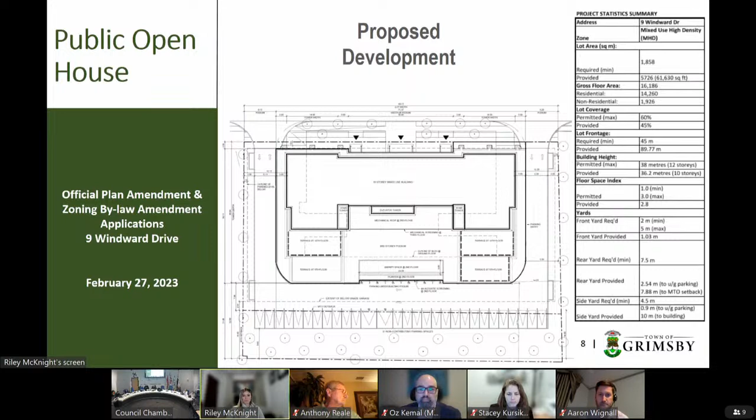As per section 1.4.4, to determine whether an amendment is appropriate, regard shall be had to numerous sections of the official plan, including section 2.0 on the vision and municipal structures, goals, and objectives, land use categories in section 3.0, and the implementation policies found in section 9.0, among other policies.

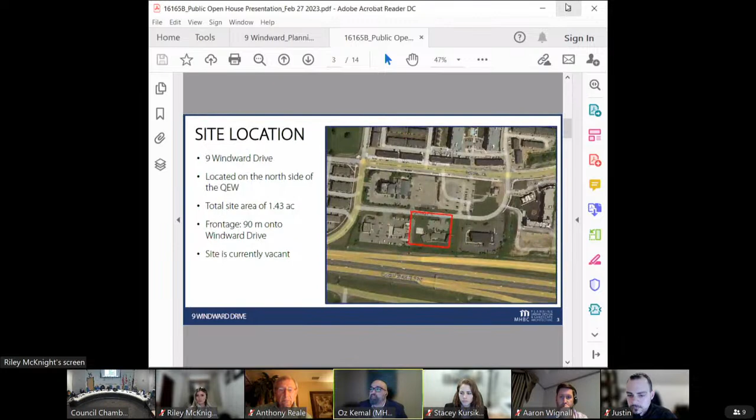Next slide, please. As Riley already pointed out, the subject site is located north of the QEW, west of the Casablanca interchange. The site is approximately 1.43 acres in size with 90 meters of frontage on Windward Drive. The land is currently vacant, but was previously used for a model home sales center, which were removed in September of 2022.

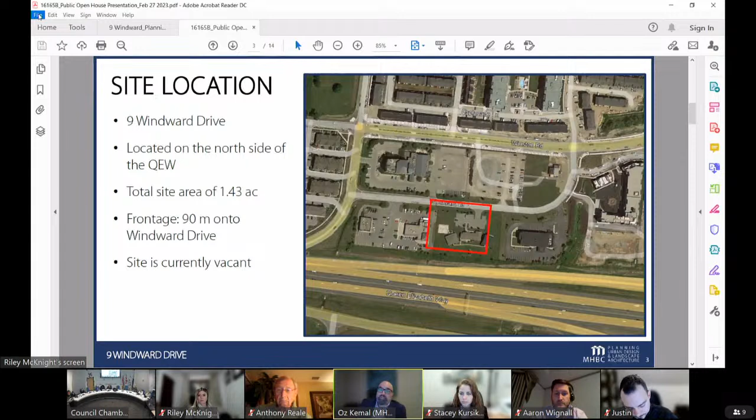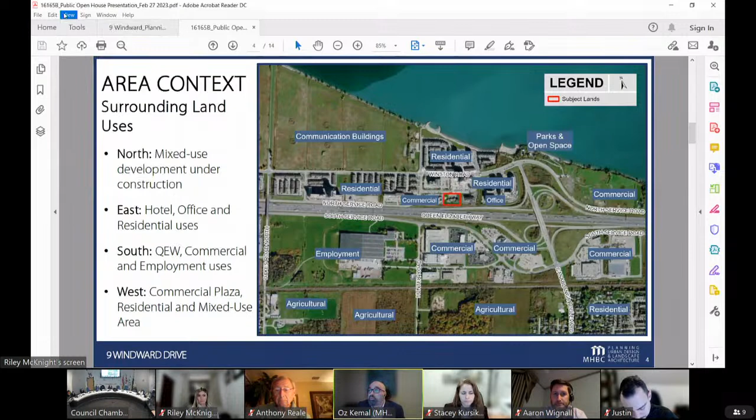Next slide, please. This is just a slide showing the subject lands in red, and then some surrounding area context. As you can see, there's a variety of uses, and the area is undergoing significant growth and transformation. To the north, opposite Windward Drive, there's a mixed-use development currently under construction, which we'll talk about in a little bit. To the east, abutting the subject lands, is a 4-story hotel, and beyond that is an office building and some new residential development. To the south is the QEW, and beyond that, there are commercial and employment uses such as car dealerships and industrial buildings. To the west of us, abutting the subject lands, is a 1-story commercial plaza with convenience-type restaurants and lower density residential and mixed-use development opposite North Service Road.

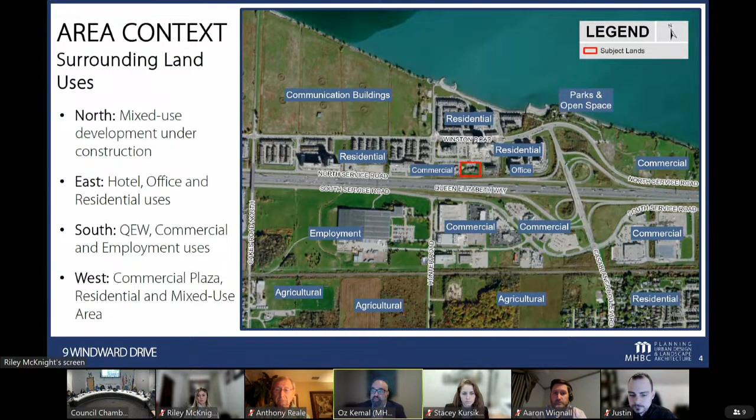Next slide, please. As I had briefly mentioned, the surrounding area is undergoing a significant amount of change, and it is an area identified for growth within the town. Immediately surrounding the site are 3 recently approved or constructed developments as follows.

Number 1, this is 4 Windward Drive, slightly northwest of the subject lands. This development was approved in 2021 and contains 2 mixed-use podium-style buildings, 12 and 19 stories, with townhouse units as well, and permissions for hotel and commercial uses.

Number 2 represents 10 Windward Drive and is located directly opposite the subject site and is currently nearing completion. This development contains 1 20-story residential building with 206 units plus 27 townhouses along the perimeter of the site with some ground floor commercial uses.

Number 3, that's 13 Windward Drive, and that's just east of the subject lands. It is fully built out. The development consists of a 5-story office building abutting the QEW and 3 residential buildings ranging in height from 4 to 10 stories. Next slide, please.

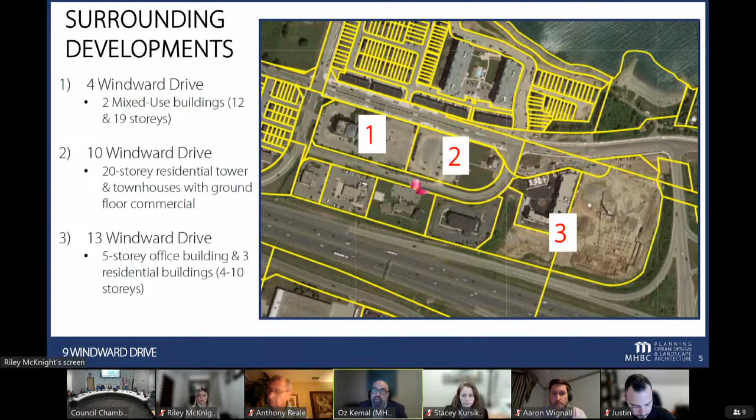Now we're going to do a proposal overview, slightly different than what Riley had gone through. The application proposes a 10-story mixed-use building with 121 residential units and just under 2,000 square meters of employment commercial units on the first 2 floors, with a total lot coverage of 45%.

The setbacks to the portion of the building at grade are 1.03 meters from the front yard abutting Windward Drive, 7.88 meters from the rear yard abutting the QEW, excluding the 14-meter MTO setback shown there, and 10 meters for the interior side yards. To accommodate the below grade parking structure, reductions to those setbacks are being sought and will be discussed shortly.

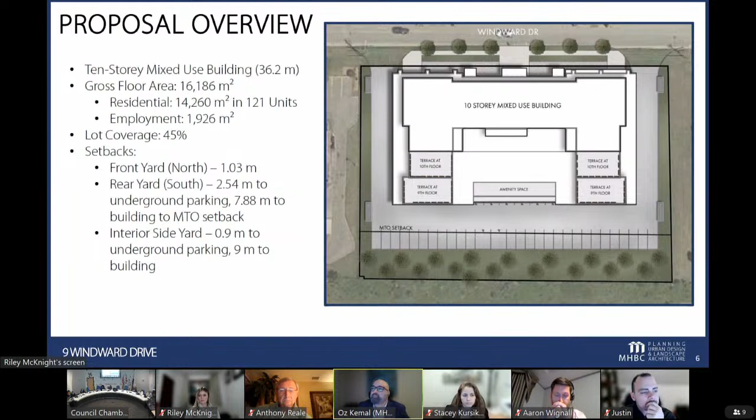Due to the property's adjacency to the QEW, a 14-meter MTO setback is required along the rear property line, on the south side of the page. No structures or required parking spaces are permitted within this area.

Parking will be contained in 2 levels of below grade parking, as well as some surface level parking along the sides and rear of the building. A total of 250 contributing parking spaces are proposed, including 12 accessible spaces, as well as 57 bicycle parking spaces. There will be a total of 58 surface parking spaces, 29 contributing spaces, 7 of which are accessible, and 29 additional non-contributing spaces with 2 accessible parking spaces, located along the rear of the property abutting the QEW. These spaces are non-contributing as they are located within the MTO's 14-meter setback—while we're allowed to have them to service the development, they can't be counted as part of the required parking.

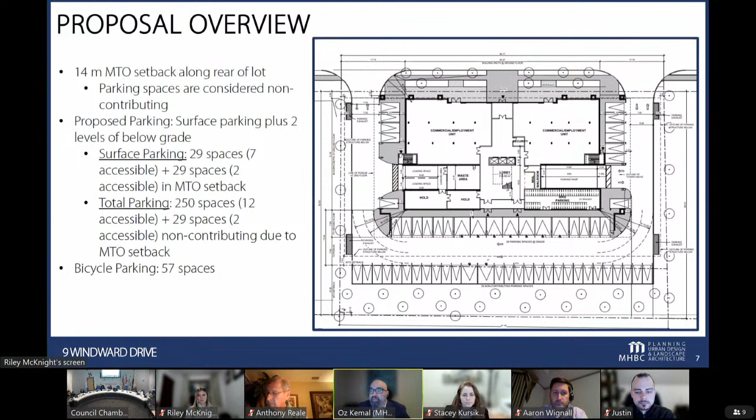As part of the official plan and zoning bylaw amendment, the following studies were prepared and submitted in support of the application: a planning justification report, a tree preservation plan and arborist report, a shadow study, an urban design brief, a functional servicing report, a transportation impact study, a noise impact study, a phase 1 environmental site assessment, and a stage 1-2 archaeological assessment. All of these studies are available on the town's website.

The subject lands are designated as residential mixed-use area within the town's official plan, which permits the proposed development as a mixed-use development. The lands also fall within the Winston Road Neighborhood Secondary Plan, which designates them as mixed-use high density and permits a variety of uses and built form, including mixed-use buildings. In addition, the secondary plan identifies an employment overlay on the lands immediately abutting the QEW, shown in the blue hatching on the lower image.

As Riley pointed out, policy 11.3.3.2H of the Winston Road Neighborhood Secondary Plan reserves the land for employment-generating uses. As a result, an official plan amendment is being sought to allow for residential uses within the employment overlay, while still providing the 1,926 square meters of GFA dedicated to employment and commercial uses on the first 2 floors.

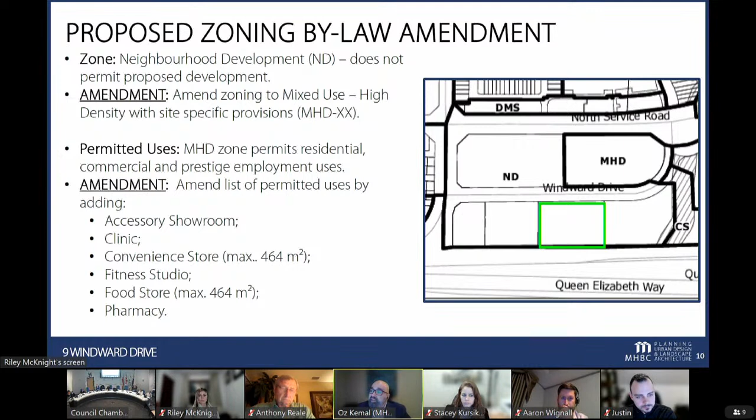In addition to the additional uses, 6 site-specific zoning provisions have been applied for to accommodate the proposed mixed-use development. The first is a minimum front yard setback reduction from 2 meters to 1 meter, to accommodate the architectural pillars located along the front facade at Windward. These pillars have been incorporated to enhance the facade and streetscape of Windward Drive.

The remainder of the building will be set back from the pillars to create depth and canopied entranceways. The next zoning adjustment requested is a reduction in the minimum interior side yard setback from 4.5 meters to 0.8 meters, to accommodate the below grade parking structure. This is required to achieve an acceptable floor plate due to the loss of site area from the 14-meter MTO setback at the rear of the property. This reduction will not be visible above ground, and the building will be set back over 9 meters from the side lot lines, well exceeding the minimum required setback.

The next provision requested was a minimum rear yard setback reduction from 7.5 meters to 2 meters, to accommodate the below grade structure. Similar to the interior side yard, this reduction is to accommodate the below grade structure only, taking into account the MTO's 14-meter setback. Visually, the building will be set back approximately 21 meters from the rear lot line and 7.88 meters from the MTO setback.

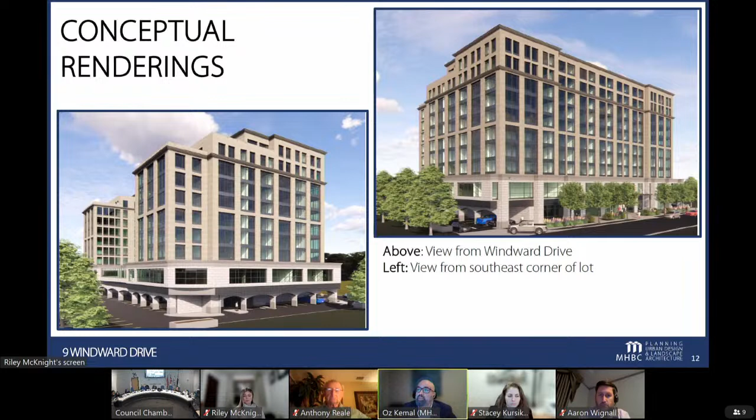At this time, we'd welcome any questions or comments from the public on the proposed development or on the information presented tonight. As Riley pointed out, there are no decisions being made tonight. If we can't answer a question, we will take it back and make sure it is addressed through our subsequent resubmission.

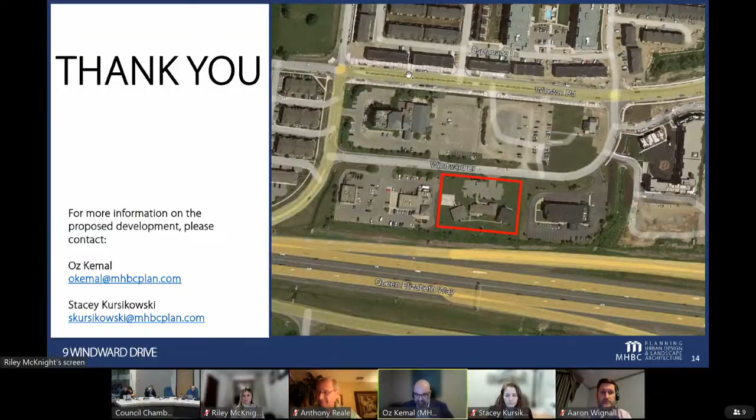This is kind of a rehash of our previous meeting, and I already know the question coming, so it might be a softball one. Just looking at the overall floor space dedicated between residential and commercial, with it being mixed use, I think 8% dedicated to commercial is slightly low. Would appreciate if you could look at increasing that by any means, just kind of looking out for Grimsby's tax revenue. Thanks.

Thank you, Councillor. Councillor Davoli. Thank you, Mr. Mayor. Through you, I don't know if Ms. McKnight can answer this.

So slide 10 of staff's presentation talked about the current permitted uses. I'm just trying to understand. I don't understand what an employment overlay is. Is this employment land, and the proposal is to change the zoning to allow for residential, or is residential currently allowed on this site? And then I have other questions.

Through you, Mr. Chair, thank you for your question, Councillor. The current designation of the property under the secondary plan is mixed use high density, but there is an employment overlay over top of that designation. So the mixed use high density does permit residential and commercial employment uses. However, the employment overlay does restrict all uses to be employment generating only. So the proposal by the applicant is to permit residential uses over the employment overlay on the subject lands. Thank you.

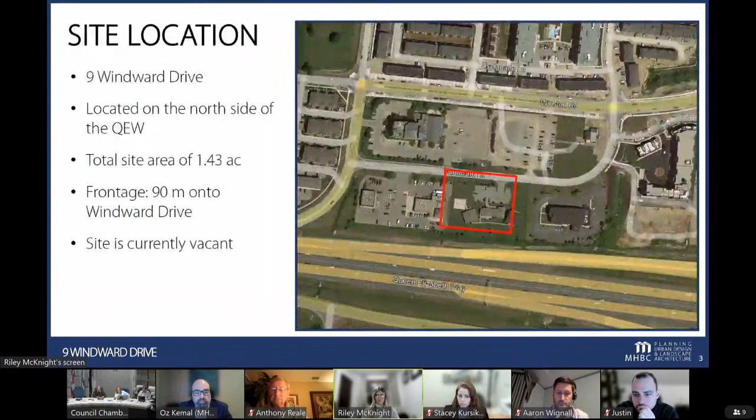I was hoping we'd have something a little more fulsome, because you can't really see the road here, and I can't quite picture it with context with everything around it.

So my one concern is just getting in and out with the fire trucks, if that was ever an issue, and just parking with the surrounding areas, getting in and out of the building, and also the other buildings being able to get in and out of their own parking lots as well.

What else was I going to ask here? Oh, Riley, if you could just expand on the employment overlay - you started to get into it, and said there were specific uses. I know Walter went over it, but is there anything else you had to add there regarding specific uses for that employment overlay? I don't understand employment overlay all that well either, so anything you can offer would be great.

Yes, through you, Mr. Mayor. So we do have a list of permitted uses within the mixed-use high-density designation, and with the employment overlay, it permits only select uses from that list. I don't have it up quite at the moment, but I can share that with you following this meeting today. From a larger list of uses permitted in the mixed use designation, only a few select of those would be permitted within the employment overlay area.